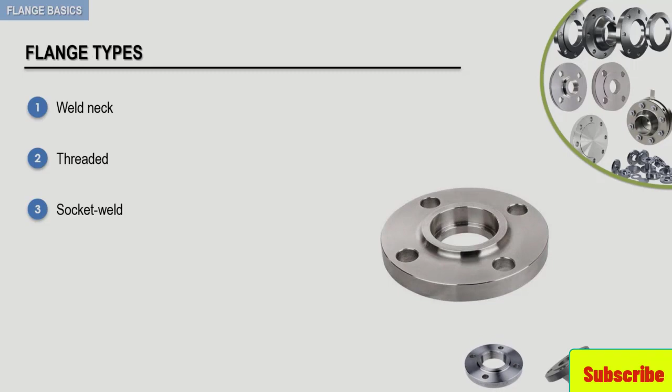Weld neck, as seen here, threaded, socket weld, slip-on, lap joint, reducing, blind, and orifice.

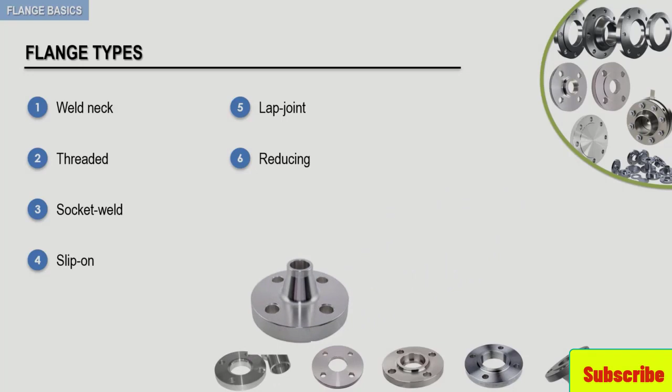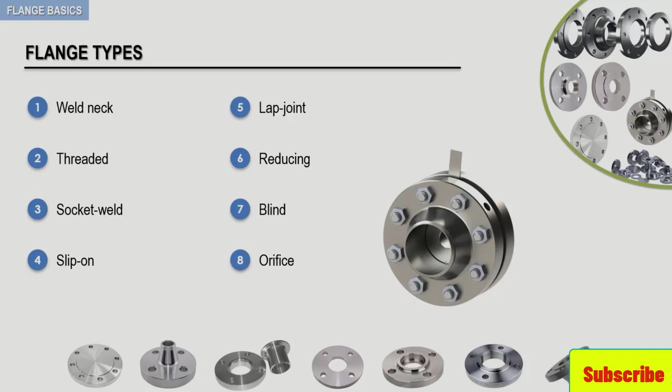In the next couple of videos, a photograph and short description will accompany each flange, as well as symbols to depict the flange as it would appear on engineering drawings, such as piping isometrics. The first type of flange we will cover is the weld neck. So, if you are ready, then move on to the next video.

The weld neck flange, as depicted in this example, is occasionally referred to as the high hub flange. It is designed to reduce high stress concentrations at the base of the flange by transferring stress to the adjoining pipe. Now, although expensive, the weld neck flange is the best designed butt weld flange available because of its inherent structural value and ease of assembly.

Known for its strength and resistance to dishing, the weld neck flange is manufactured with a long tapered hub. The tapered hub is created by the gradual increase in metal thickness from the weld joint to the flange facing. The symmetrical taper transition is extremely beneficial under conditions of repeated bending caused by line expansion, contraction, or other external forces. The following figure shows the weld neck flange drawing symbols for both single and double line representation.

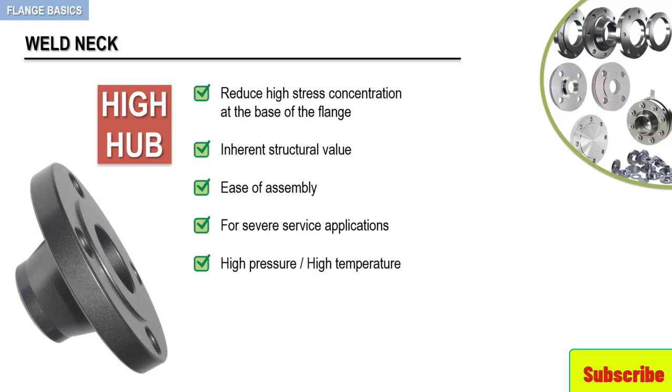Now, keep in mind, weld neck flanges are normally used in severe service applications involving high pressures, high temperatures, or even sub-zero conditions. The hole in a weld neck flange, as highlighted here, is bored to match the ID of the adjoining pipe. In other words, the thinner the wall thickness of the pipe, the larger the bore through the flange. Conversely, the thicker the wall thickness of the pipe, the smaller the bore through the flange.

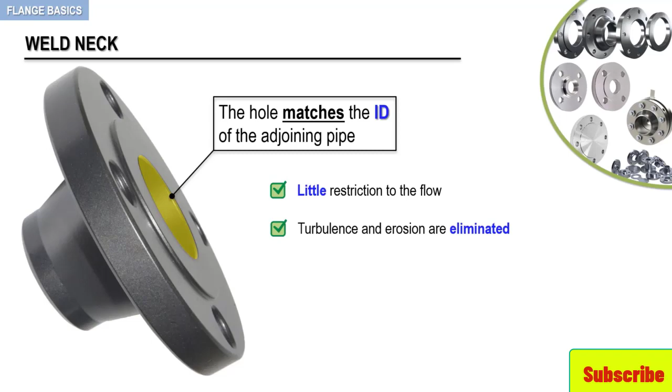Because the pipe and the flange have matching inside diameters, there is little restriction to the flow. Turbulence and erosion are therefore eliminated. Now, before constructing the drawing symbols or designing the weld neck flanges, three important dimensions must be determined. These dimensions can be found on the following chart. The thumbnail image that you can see here represents the raised face weld neck flange, RFWN, as well as the position of its three dimensions in the chart.

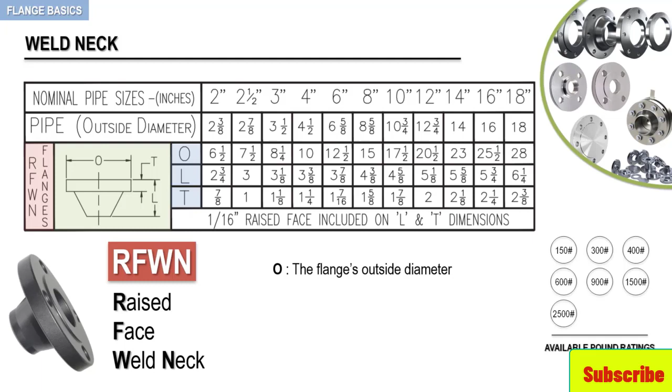The three dimensions needed are O, L, and T. The O dimension represents the flange's outside diameter. The T defines the flange's face thickness. And the L provides the length of the flange, or length through hub dimension. These three dimensions vary for each pipe size and pound rating, and must be determined before constructing the drawing symbols of each flange or designing it.

Now, to find the numerical values for these dimensions of a particular flange, select the appropriate pound rating chart, which is 150, 300, 400, and so on. For example, the chart seen here is for 300 pound rating. Next, find the proper size pipe in the nominal pipe size row highlighted here in purple. Then follow the pipe size column down through the chart to determine the O, T, and L dimensions.

For demonstration purposes, a 14-inch 300-pound raised face weld neck flange will have the following dimensions. O, the outside diameter, equal to 23 inch, L, the length through hub, and T, the flange face thickness as follows. Now, as an exercise for you, use the same step-by-step procedure and the following chart to determine the dimensions for a 10-inch, 600-pound rating raised face weld neck flange. You will find the O, T, and L measurements for this flange to be as follows.

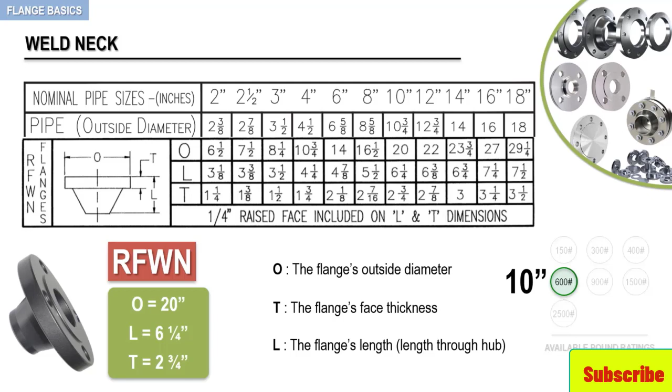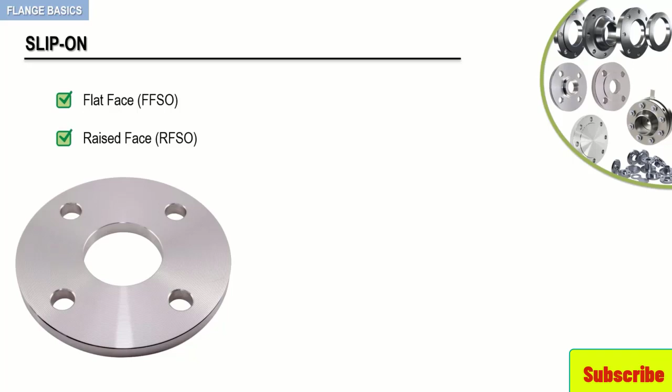The slip-on flange, as in this example, has a low hub that allows the pipe to be inserted into the flange prior to welding. Available with a flat or raised face and shorter in length than a weld neck flange, the slip-on flange is used in applications where short tie-ins are necessary, or where space limitations necessitate its use, and also in replacement operations when connecting pre-existing equipment.

The slip-on flange does have two significant disadvantages. One, the requirement of two fillet welds, one internal and one external, to provide sufficient strength and prevent leakage. And two, a reduced lifespan, about 1/3 that of the weld neck flange. Slip-on flanges are preferred over welding neck flanges by many users because of their lower initial cost. However, the total cost after installation is not much less than the welding neck because of the additional welding involved.

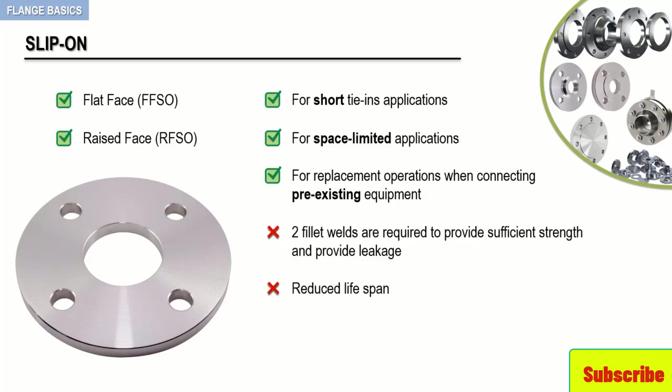The following chart provides dimensions of the slip-on flange for 150-pound rating. The thumbnail image that you can see here represents a typical example of a slip-on flange and highlights the position of its 6 dimensions. In this example, the O dimension represents the flange's outside diameter. The R defines the raised face outside diameter. The B2 provides the diameter of the flange bore. The X defines the hub outside diameter. The C, the flange face thickness. And finally, the Y2 provides the flange's length, or length through hub dimension.

These dimensions vary for each pipe size and pound rating, and must be determined before constructing the drawing symbols of each flange or designing it. Now, to find the numerical values for these dimensions of a particular flange, you will need to use the same methodology as explained in the previous video. Recall, first, select the appropriate pound rating chart, which can be 150, 300, 400, and so on. In this example, the chart corresponds to a 150-pound rating slip-on flange.

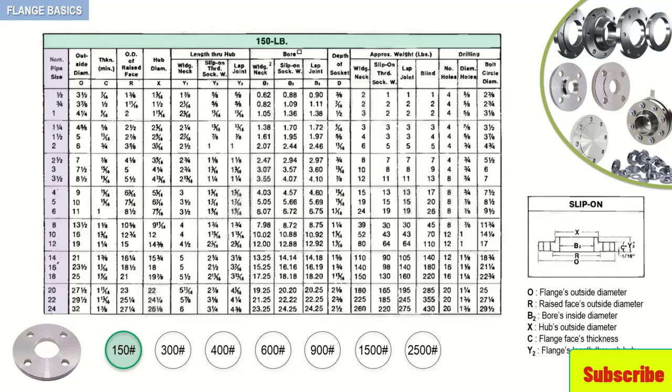Next, find the proper pipe size in the nominal pipe size column, highlighted here in purple. Then follow the pipe size row to the right through the chart to determine the various dimensions. For demonstration purposes, a 6-inch, 150-pound rating slip-on flange will have the following dimensions.